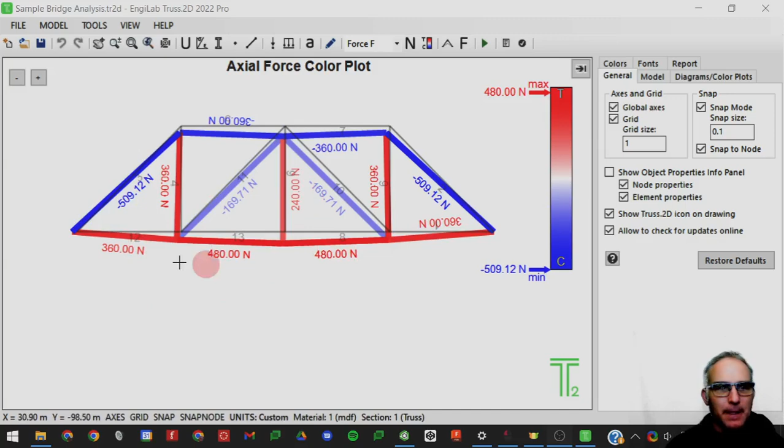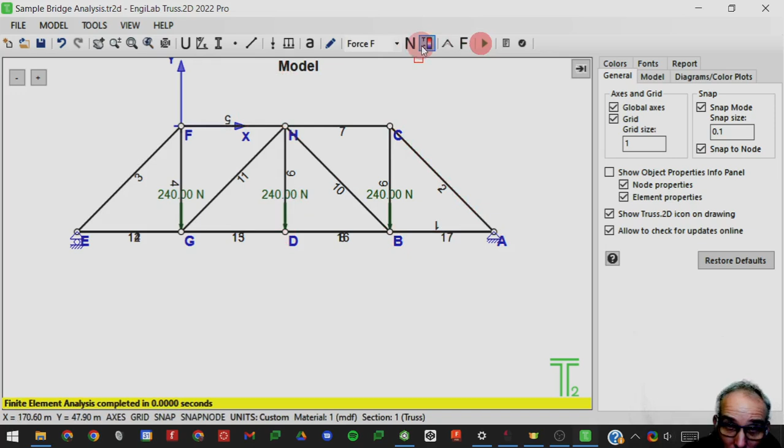Okay, in this video we are going to address this high tension we have in the bottom chord. One way to address that in Engilab is to double up the members on the bottom. We can do that by just drawing another member there and one there. Notice there's two there, and then we run our analysis.

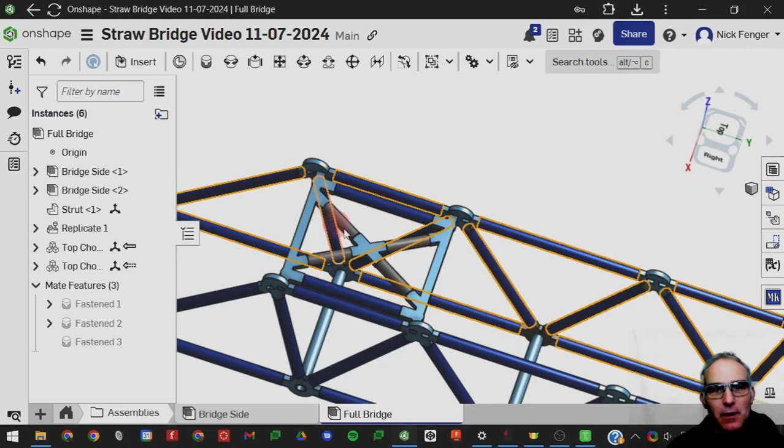We'll see that our tension has dropped significantly. So we want to do that in Onshape by adding another row of straws. That's probably the easiest way. You could apply the same process as we did on the top by adding bracing, but you wouldn't need cross bracing because it's tension only. I think it might just be easiest, because we've got to then deal with these holes we need to load the bridge, to just add a row of straws and nodes.

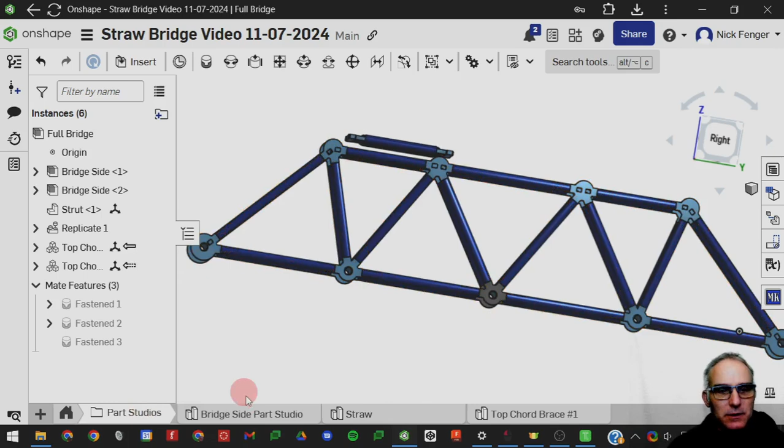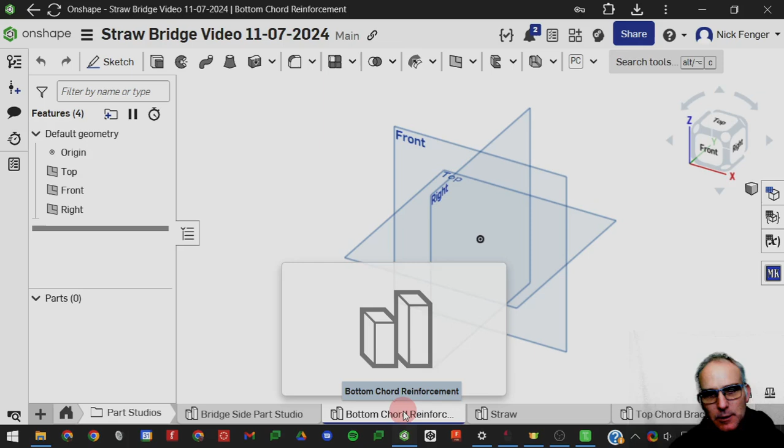So let's go and create a new Part Studio, and let's call this one lower, or bottom chord. And now it's going to be a tension reinforcement, but it's still reinforcement. We will need to bring in the sketch from our side Part Studio.

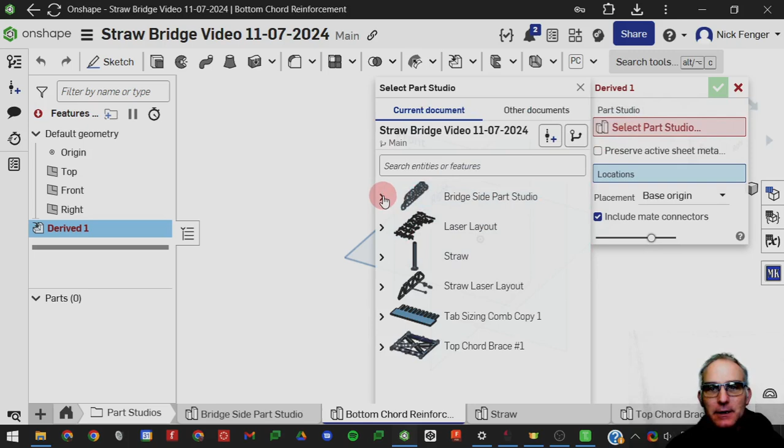So we need to do what's called a derive. Click that. We want to select the bridge side Part Studio, and actually we want to select just the side sketch. That's all we need, just the 2D truss sketch. And it should just put it right in there.

Okay, we'll get rid of our planes, I don't think we need to see any of those here. So yours might have come in off center. Mine is aligned to the origin, so we have it there. We've got a few pieces of points in there, I'm not sure where those are coming from.

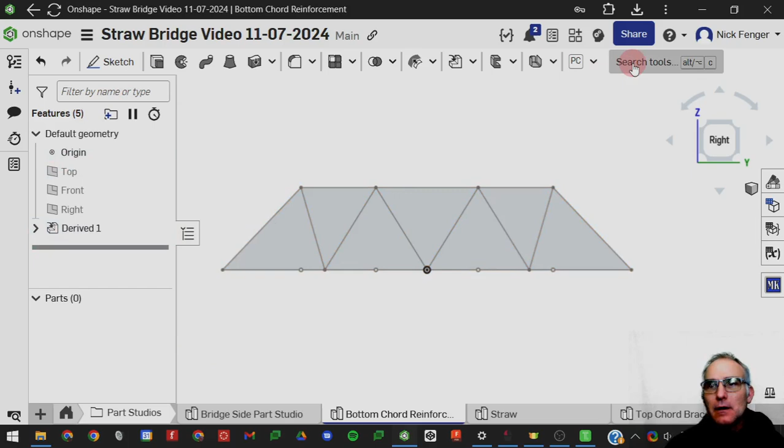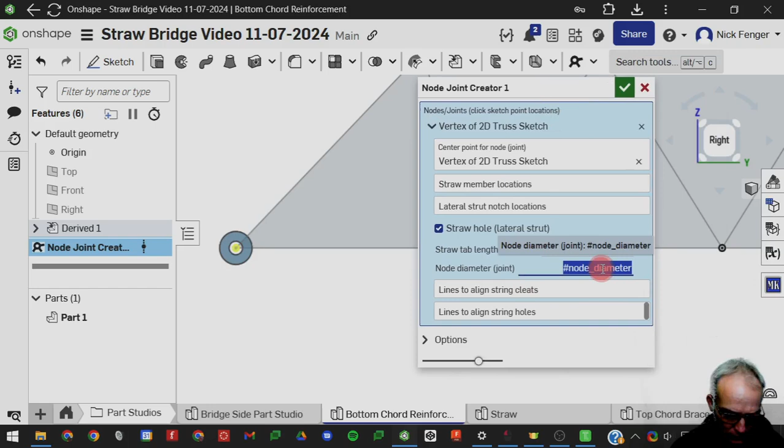But what we'll do here is add a node creator, just like you always have, node creator, and we're going to add that here. You may want to match the size you used in your side Part Studio. I think some people used a large node for here, so you can change that to large node. I think that one is large, a lot of people did that for that first one.

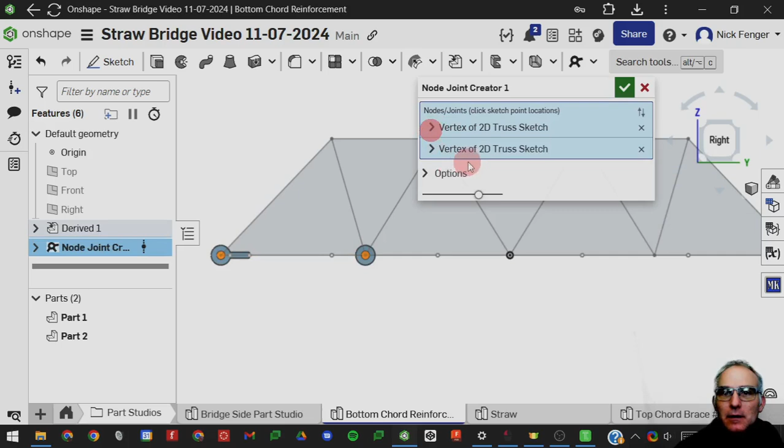We can add, we're going to mirror this. We won't mirror that one, so we'll just mirror these two and draw the other one separate. We need some tabs on these, or some straw tabs. So add that one and add this to the second one. We need one here.

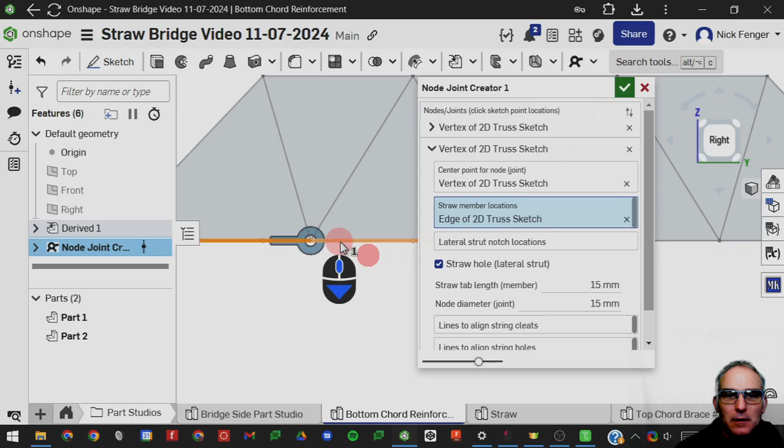Straw member, and there. Okay, and then another node creator for the middle. There it is. This one will need straw member locations here and here, and then we'll mirror.

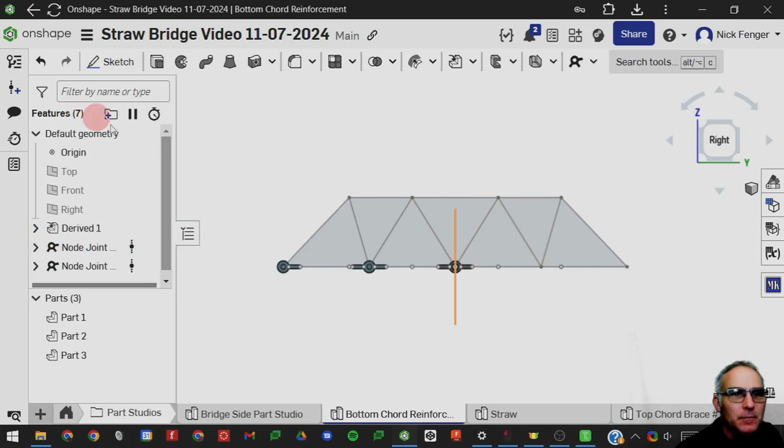We don't have a center line, so let's see, I guess I have a plane there. I do need a plane. I have the front plane right there, so we can mirror these parts across that plane. Mirror.

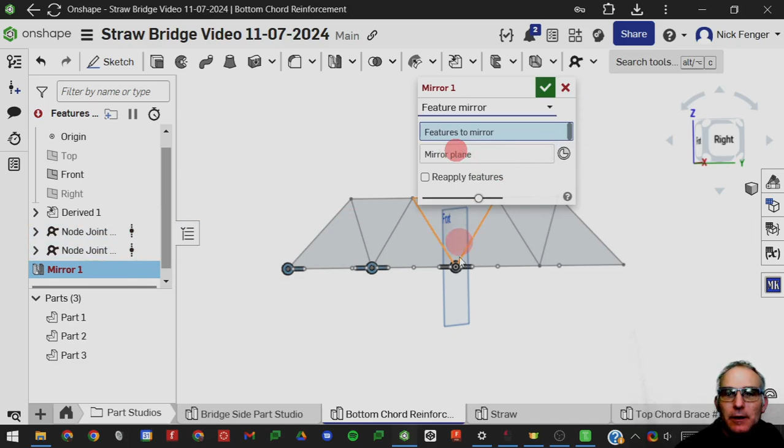If you don't have a plane there, you can just draw the nodes, you don't have to mirror. Remember, we've got to do a feature mirror, mirror plane, the front plane, and features. We want to mirror this one. Mirror plane, front.

Okay, and that's it. Now we just need our straw center lines. We do need a new sketch for that, and I'll do that on, I hid the right plane, so I'm going to choose the right plane, and then straw center line. Remember, QL for our straw center lines.

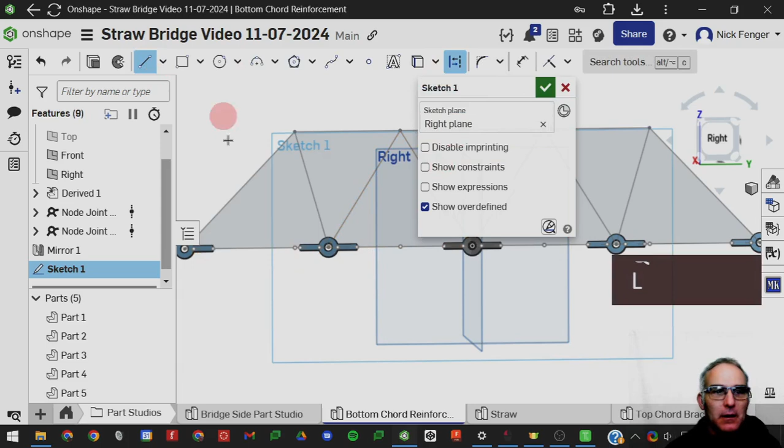Oh, my doggies are barking.

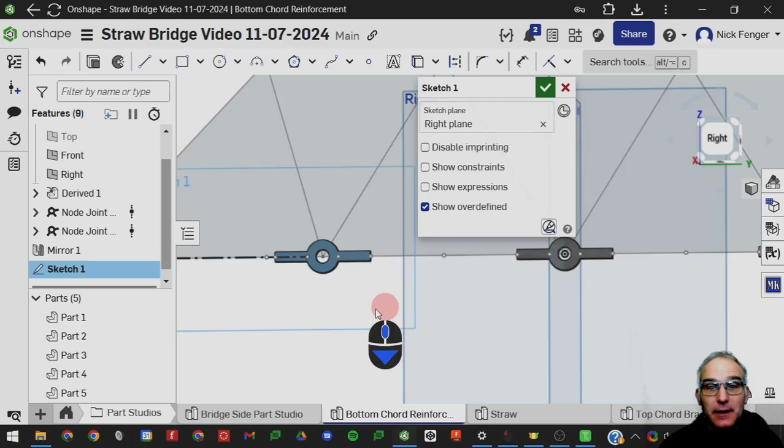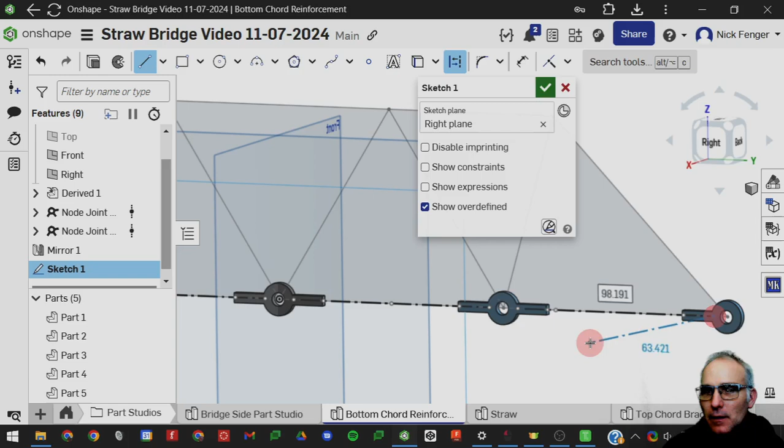Okay, continuing right along, QL, QL, and we want to go here, there's our straw, escape, QL. Oh boy, what happened? Okay, I flipped it around. Oops, going too fast. Escape, QL, and there we go, that looks good.

Okay, and then we need to do our frame tool. ME frame. Oh wait, in a sketch, I need to get out of my sketch. What's going on here? Finish my sketch. Then I can do my frame tool.

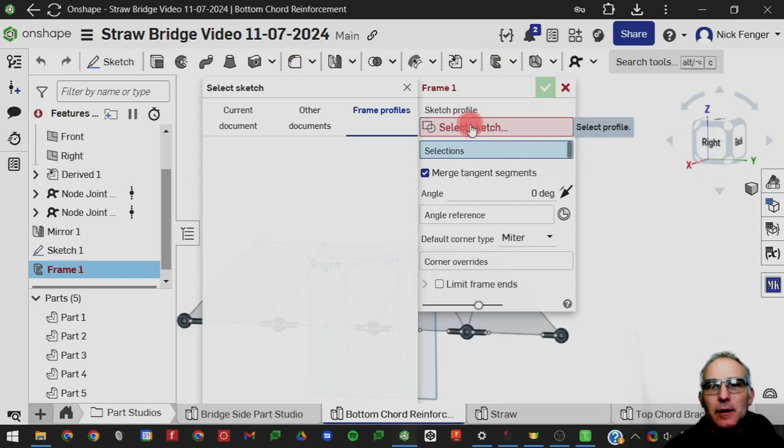And I need to pick my straw, current document, straw profile, and then choose my selections. Making my straws. There we go. Oops, what happened here? Oh, they're all connected. Oh, I know why.

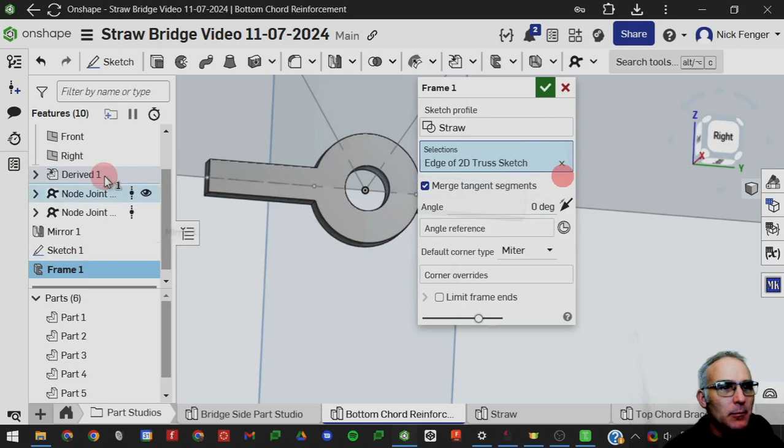I gotta hide my derived part. Now I can do it. Gotta get rid of these planes too. Okay, I'm going so fast. Selections. Okay, here we go.

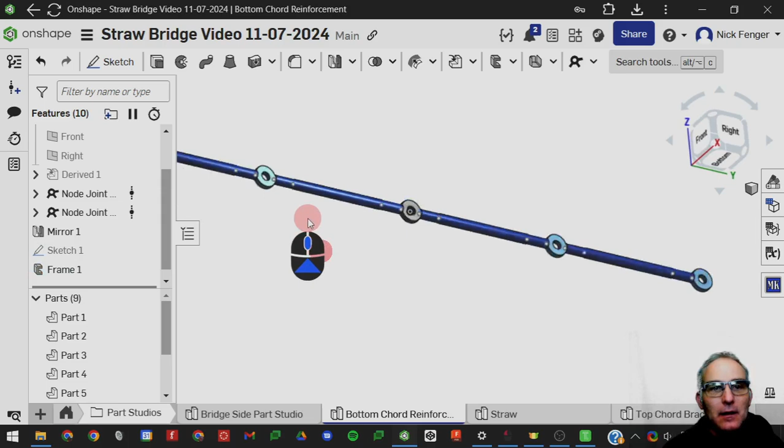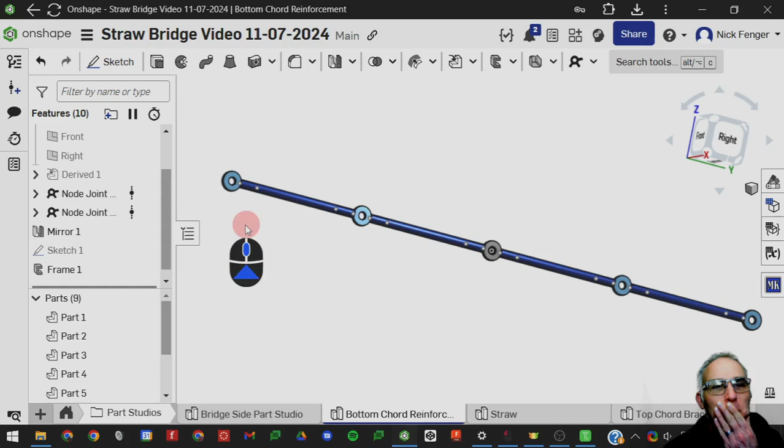And there. Okay, that's all we really need. And then let's go and attach that. I'm actually going to make one more piece on here. I'm just going to create a sketch. Actually, let's use the straw centerline sketch and show our derived sketch.

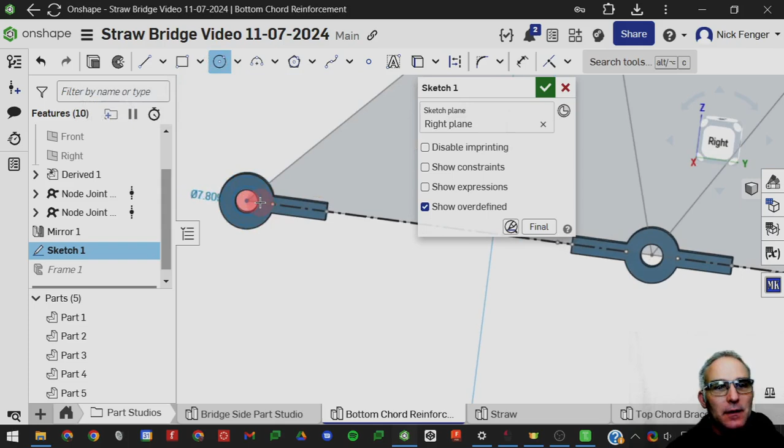I'm going to make a washer to space this out. So we're gonna go here, make a washer, and make it. I might as well match the... actually, use that point there, and yeah, we'll make it the same size, and then finish that. And I'm gonna extrude.

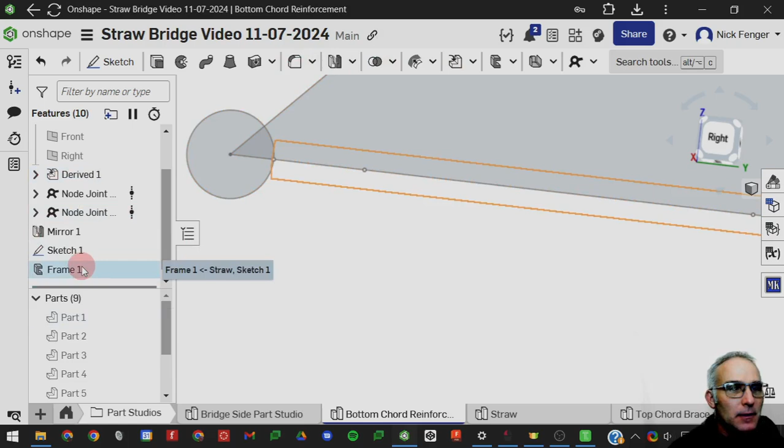I'm gonna hide all my parts. Extrude that. Oh, I need a hole in the middle. So I need to show my derives. I should show my parts. I need to use that circle. I'll use that for the straw size. Just hide all my parts. There, I got a circle.

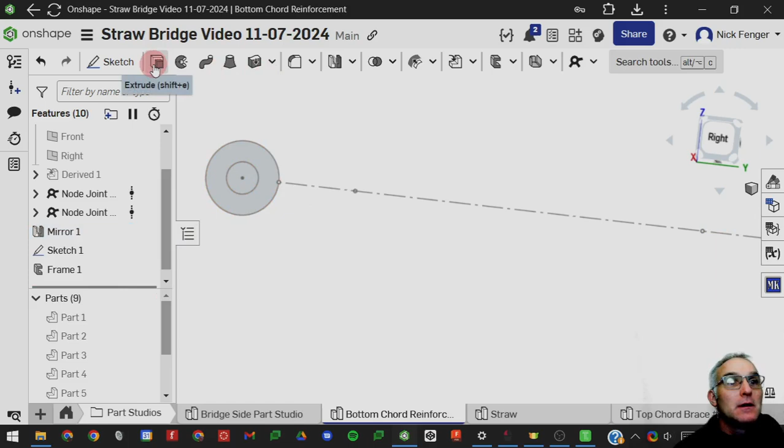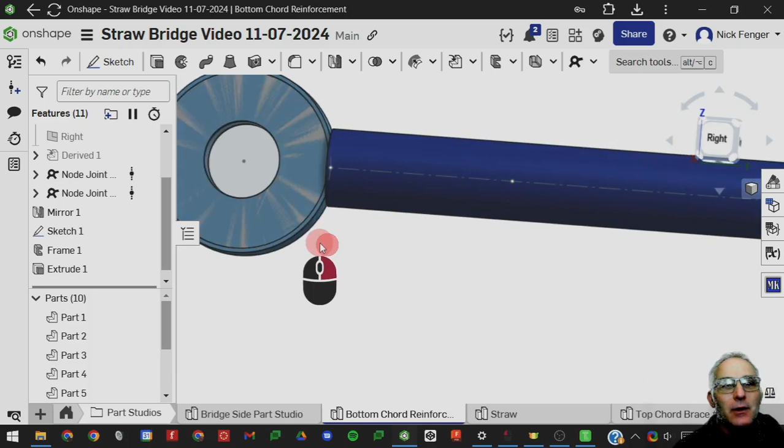So I'm going to extrude that little ring, and I'm going to do it symmetric, and I'm going to do it wood thickness. There we go. I got a washer. I'll show you how we use that. It's going to be sitting kind of inside. And notice it's slightly smaller than the straw. We actually do want that, I'll show you where it's going to go.

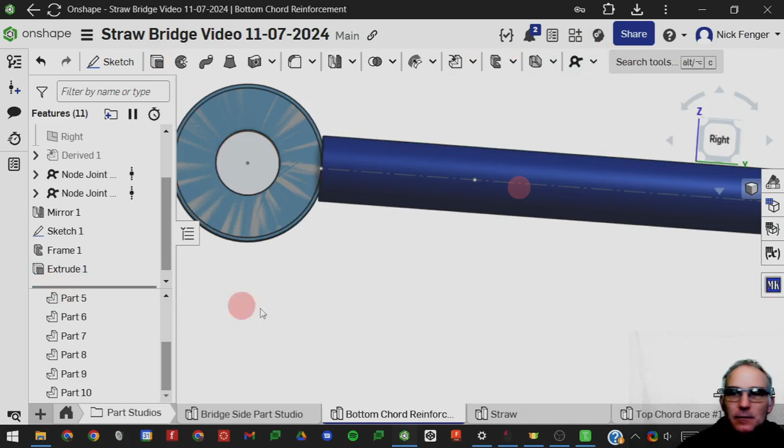So we've got our, actually, we can save ourselves a step here, make a composite part, so let's do a cut list. Okay, cut list. Did I get rid of it? Where did my cut list go? CT cut list. There we go.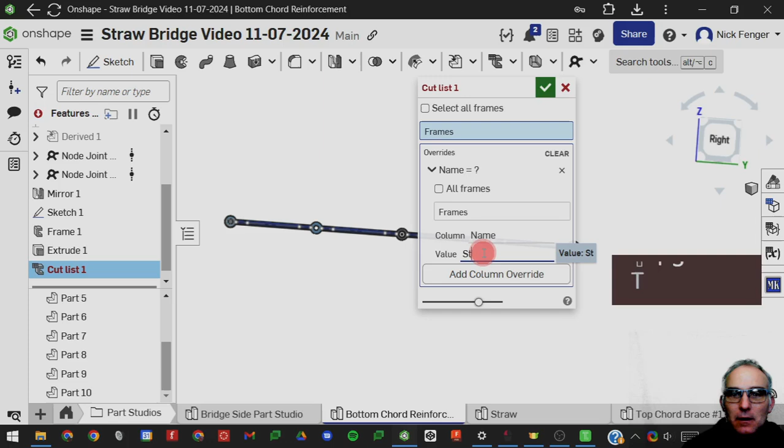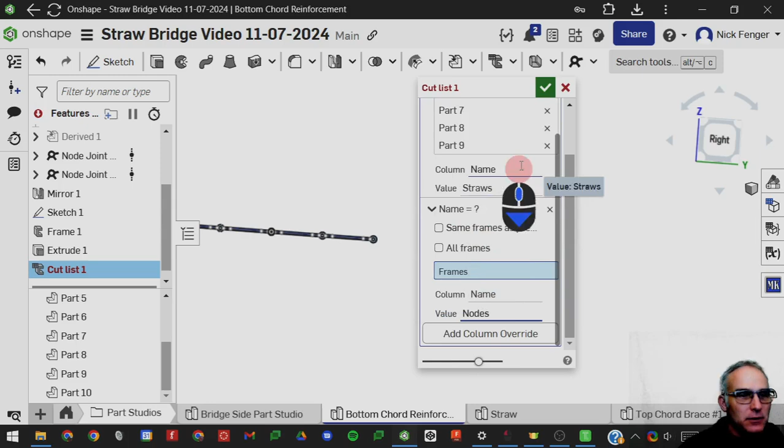So I want to add column overrides. So we want to do column name is equal to straws, and we're going to pick our straws. And add a column override, not the same column name, and we're going to call this nodes. This is going to help us with our drawings and our bill of materials, and that should have created a composite part. Oops, what did I get? Select all frames. Oh, I did not pick the nodes.

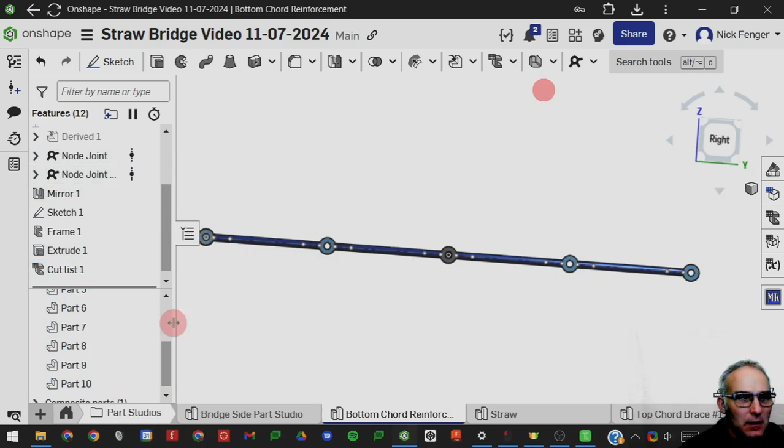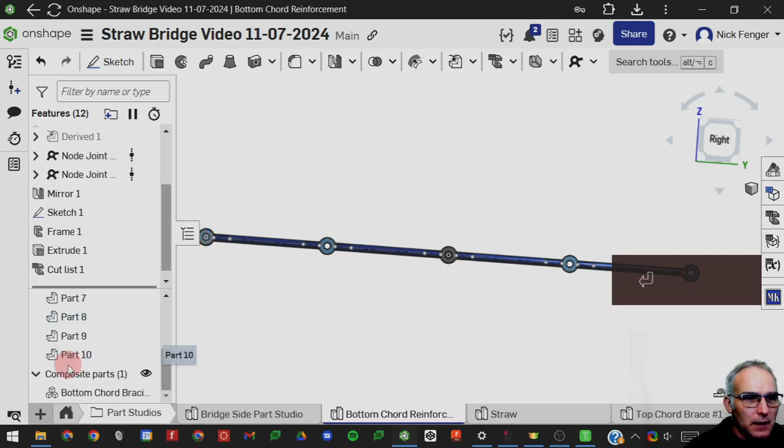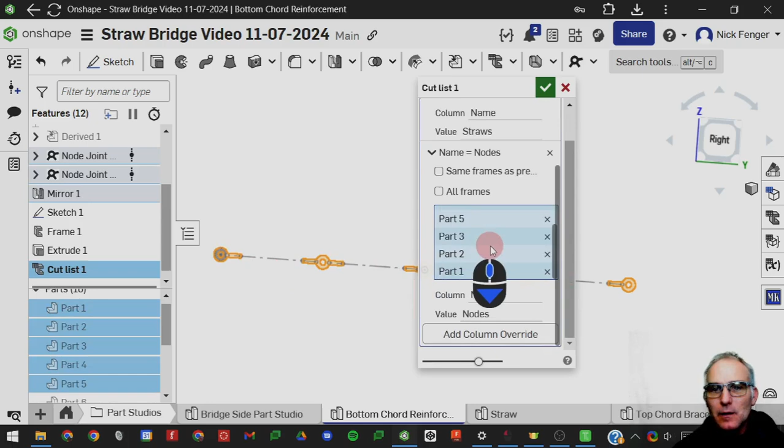Composite part. Okay, I'm gonna rename that to bottom, and then we're gonna name part 10, which is that washer. Oops, I grabbed that washer instead, so I need to fix that. Part nodes. Part 10 is not correct. I want part 9. There. Now it should just have the washer left. Rename that to washer. It's a little hard because it's right on top of there, but it works.

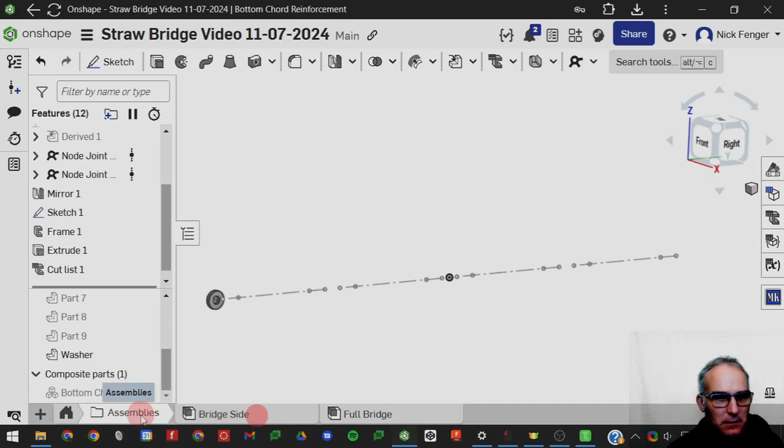Okay, now we'll go into our assembly and we're going to add that in. Full bridge. I guess we could add it to the bridge side. It'll put it on both sides. Will it put it on the correct side? That is a good question. It may not. We're going to put it in full bridge. That is easiest.

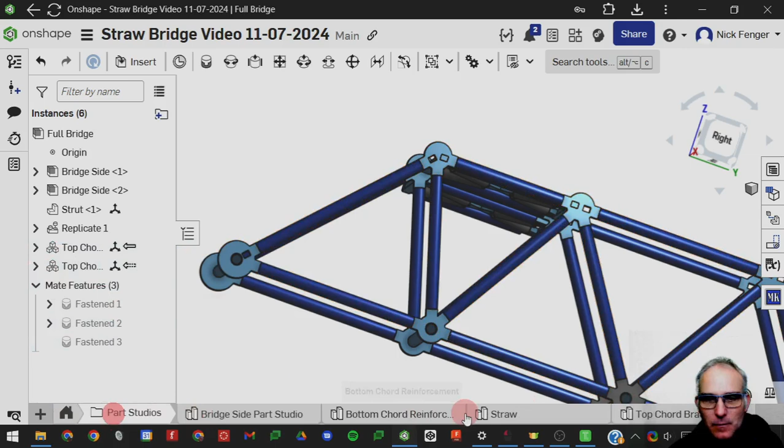You know what, I'm going to make this even easier, because we have a cut list in here. We might as well add those washers where we need them. Never mind, we're going to do it in there. Assemblies, full bridge. Let's put the washers in first. Insert. We're going to need 1, 2, 3, 4, 5. I'm going to show you a trick here. We'll start with 5 washers.

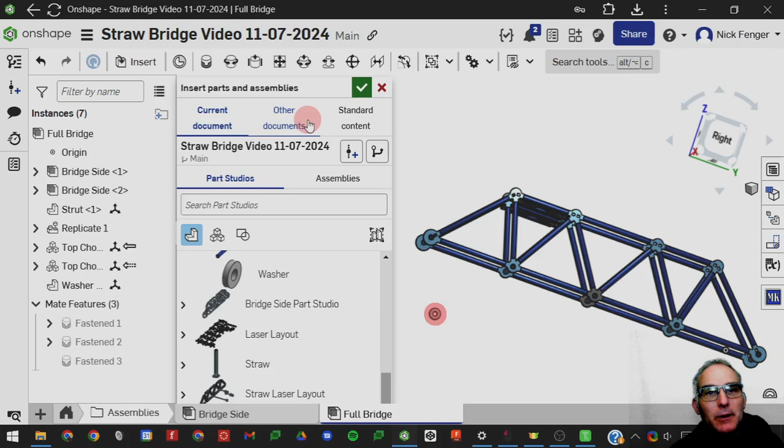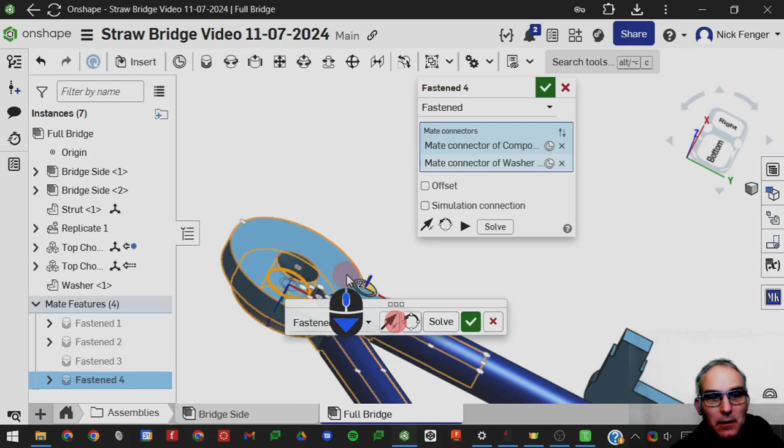So we want parts, bottom chord reinforcement, the washer. We'll try to do a replicate with it, see if it works. So we're going to mate that right onto here, on the node, and then grab the washer. It doesn't matter which side. And I got to flip it. There, I got it on the outside. Finish that. Now let's see if we can replicate those. Replicate that, and let's try plane.

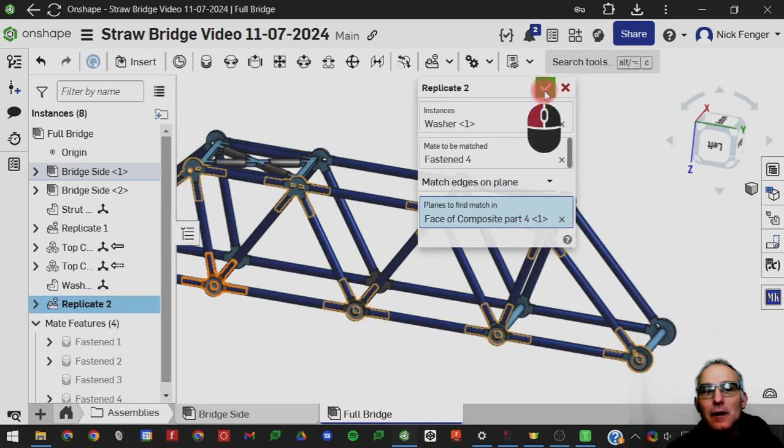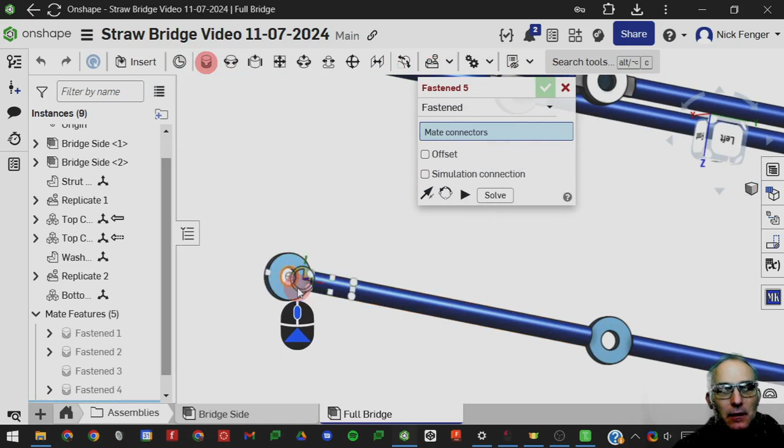Okay. Oh, it worked. There we go. There, put them all in. And let's do it. Then we're going to bring in the insert composite parts: bottom chord reinforcement, bottom chord bracing, go, and we're going to mate that on. I guess we'll mate it on, doesn't really matter, but we'll mate it on this side. Fasten mate, go. There it is.

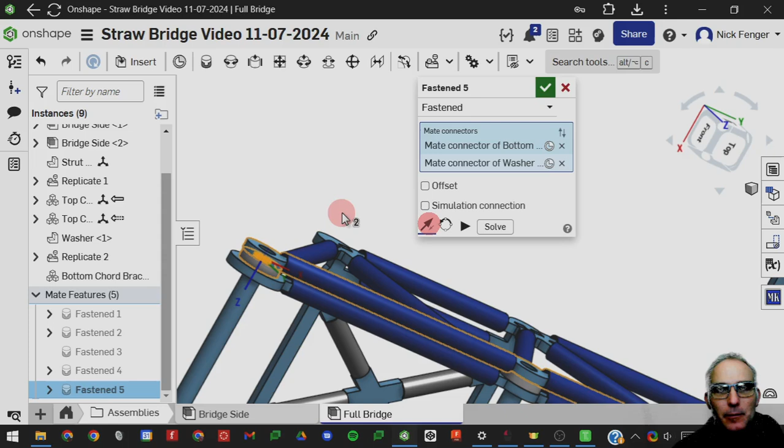And oops, did I get it? Nope, I did not get that in the right place. Fasten. I got that. Oh, I know what I need to do. I need to flip it. It flipped the wrong way. Fasten. Not that way. This way. There we go. Okay, so that gives us a little bit of space.

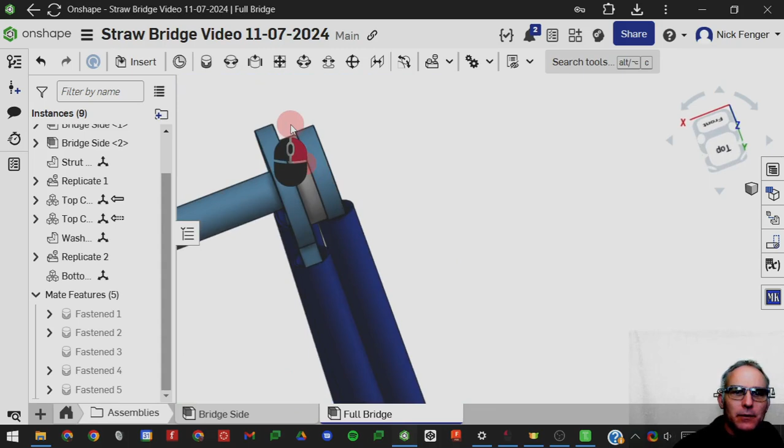Notice we might have to make that washer thicker. It's going to cause overlap here, which we cannot have. So we'll have to probably put 2 washers in there. Yeah, we're gonna have to use 2 washers. You can probably assemble this because the straws will squish, but when you do modeling, this will not work. To make this easier, let's say we're gonna use a thicker wood for this. I have wood that is slightly thicker we could use, or we could double it up. Let's just double it up.

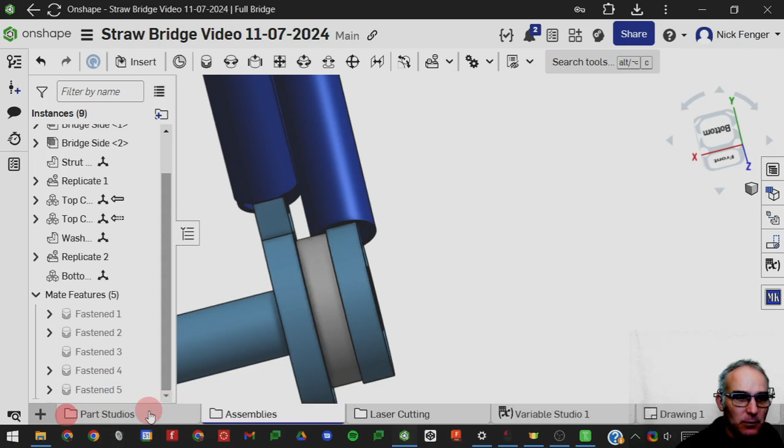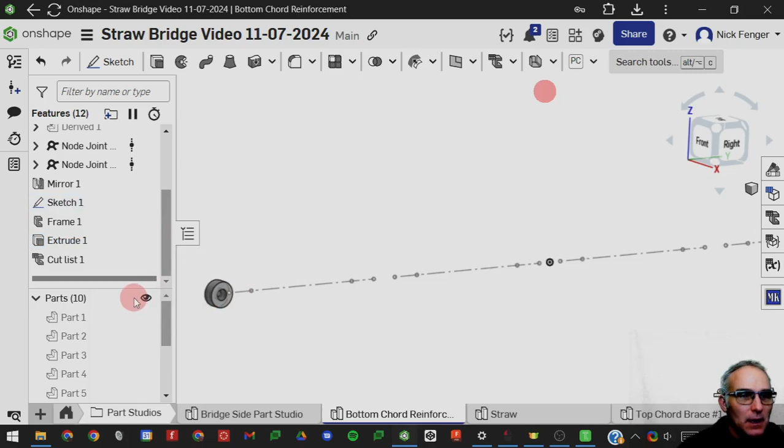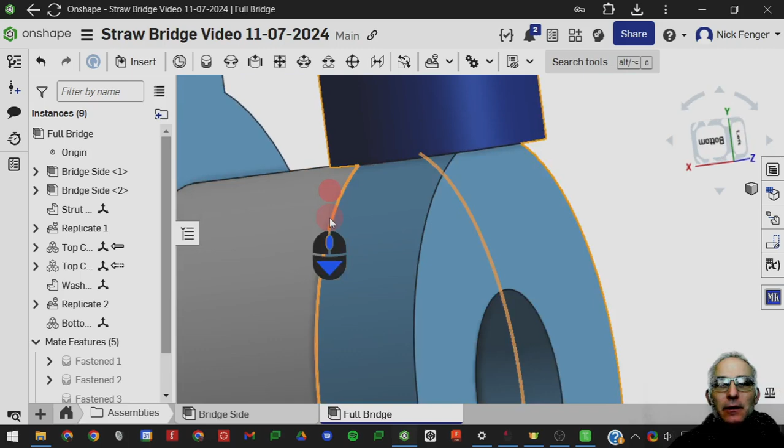Because we're gonna glue these together, we're just gonna double that width up. So extrude, we've got washers times 2, just like that, and then it'll double it up. It's going to look double thick right there. But go back to our assembly, full bridge. There we go. Now there's no interference, so that will work. And also notice there's no interference because we used that circle that was smaller than the straws. You don't want that either. There you go.

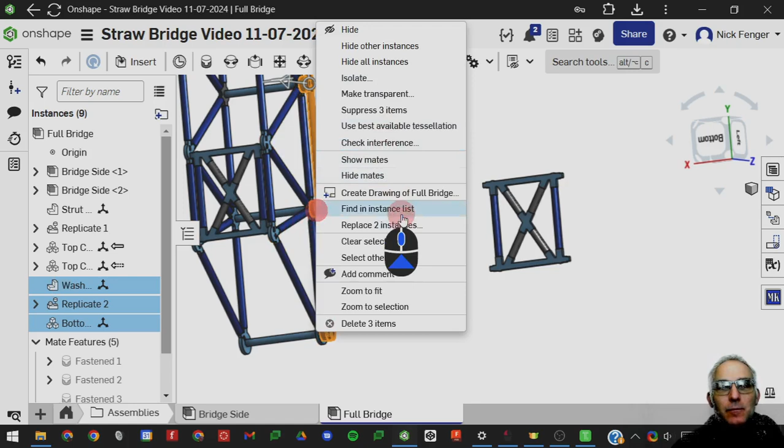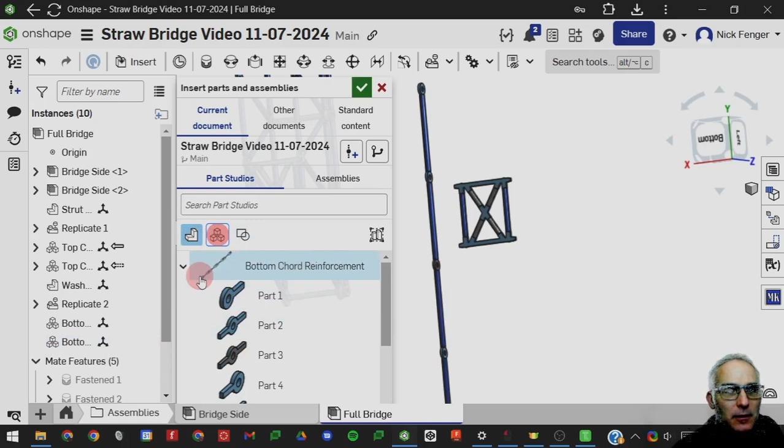One more trick. If I click on all these parts, this one. Actually, don't hold down shift in Onshape. We got the washers. We can actually make a sub-assembly if we want. So right click over here. We don't see it there for some reason. All right, we're just going to do it the hard way. We're going to duplicate this thing. Insert the same thing again. Composite parts, bottom chord reinforcement. There's that, and then let's get our washer. Oops, did I not get the washer? I did not get the washer.

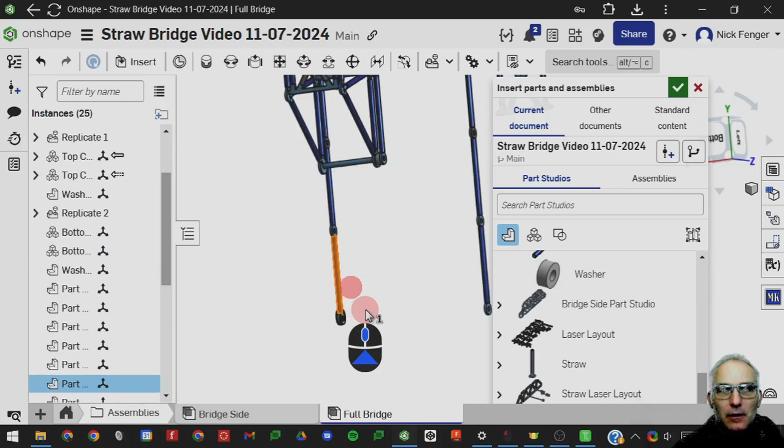There's always a faster way to do stuff. Nope, did not. Washer. Where is my washer? Parts. Why do you keep bringing in another one of those? Oh, it's bringing all those parts in. Oh, there my washer is. It's hiding. They're all over the place. Okay, I got them. All right, let's do that again.

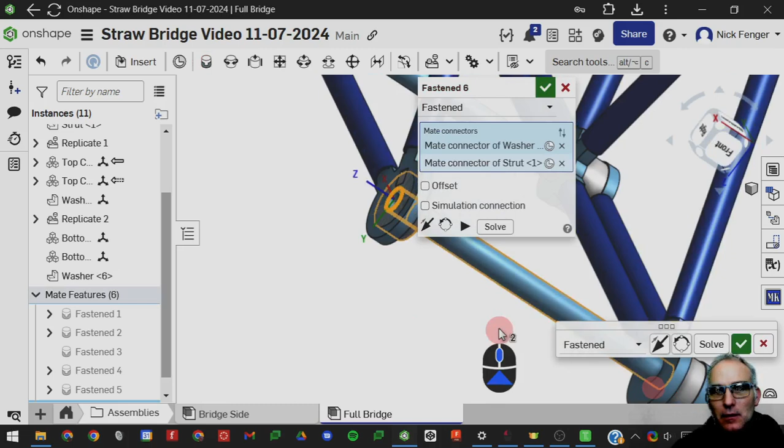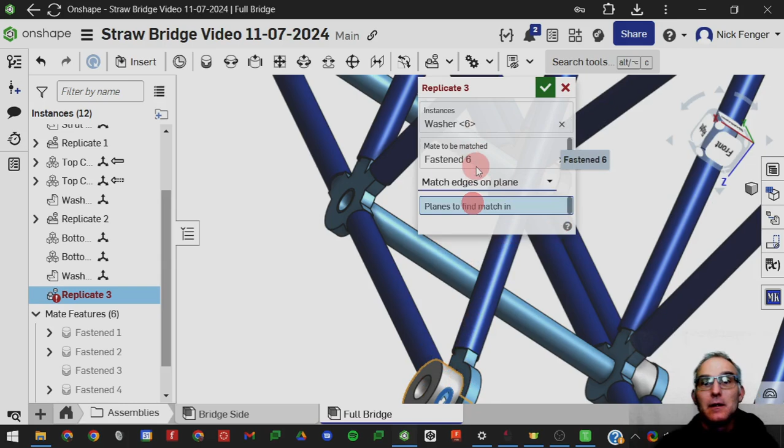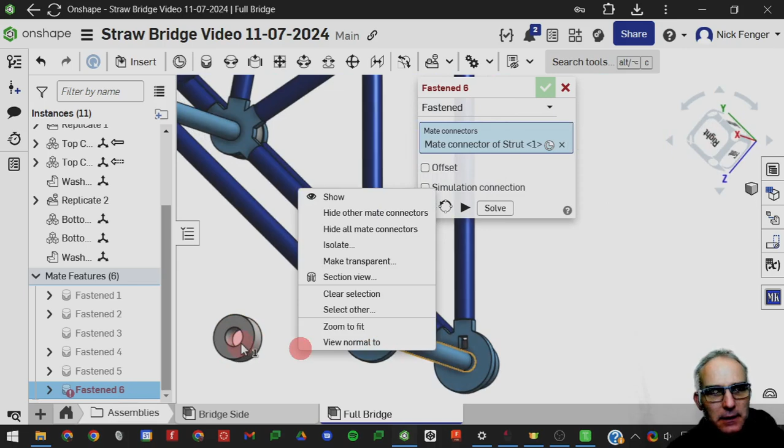So, mate connector, fasten mate, there, to there, and flip you, and replicate. Should work this time. Match edges on plane. Does not like that at all. I think it didn't like that I flipped it. I'm gonna move that fasten off again. Let's try this again. I'm gonna fasten mate. I have a hard time with replicate, so I'm gonna try to be consistent. I'm gonna match it there, end of that straw, because that is the same reference point, and solve it.

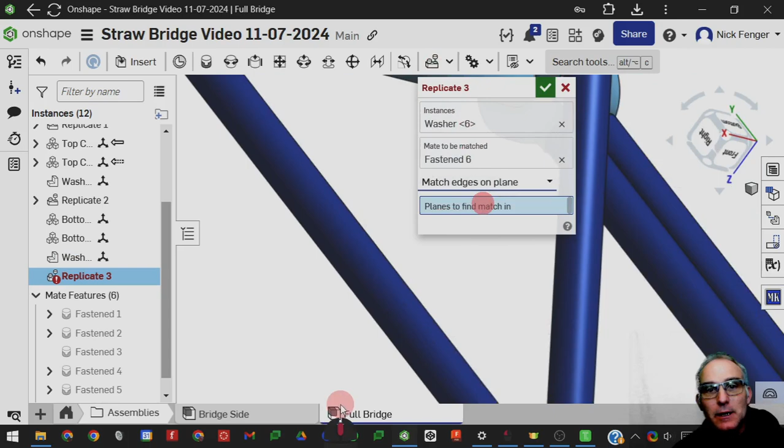And I guess I will flip it. Oops. What's going on? There we go. Sometimes you have to hit solve, otherwise things happen like that. Okay, let's try replicate one more time. Otherwise, we're just going to do this the hard way. Instances. That one. Match edges on plane. There it worked. What do you know? And now we'll mate this in. Fasten mate. And there we go. All right, now we have in essence doubled up our bottom straws.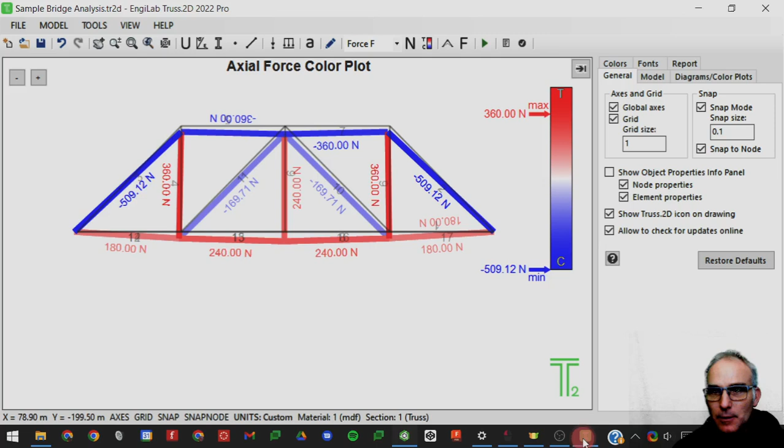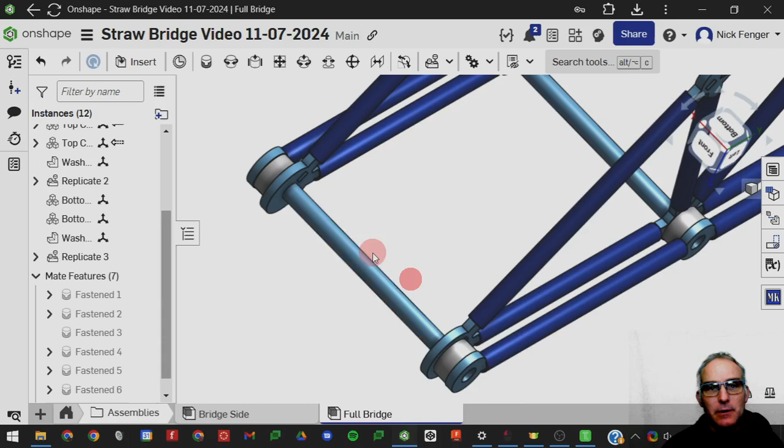And remember, they don't need reinforcements because they are in tension. We thought about putting these on the inside, but on the inside they get in the way with this brace here that goes across on this piece. So this is the way to do it. I will expand the spec this year, give you another 2 centimeters for these pieces so that you can make them wider. All right, that should do it.